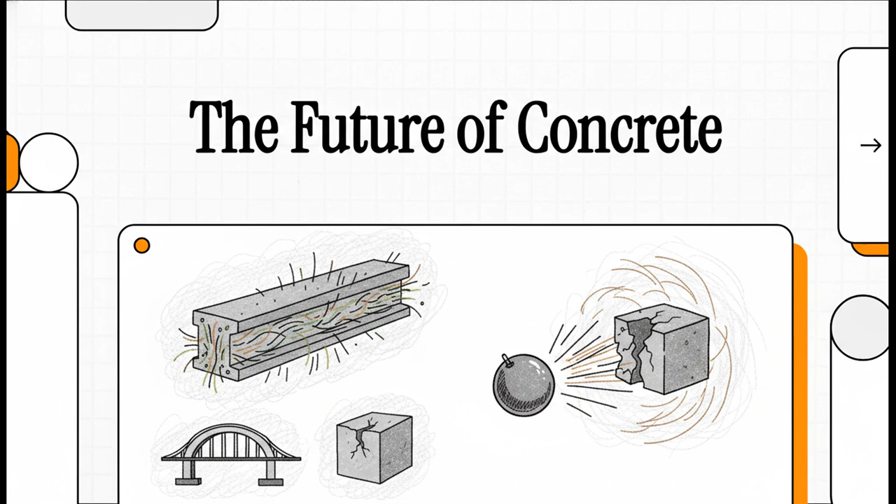All right, let's talk about the future of something we see every single day, but probably don't think about much. Concrete. I mean, it's literally the foundation of our world, but it has a breaking point. So what are we going to do to fix it? Let's dive in. Think about it. The structures we depend on, our homes, our bridges, our highways, they all face some really serious challenges. The very material that's supposed to give us strength and shelter, well, it has a fundamental weakness.

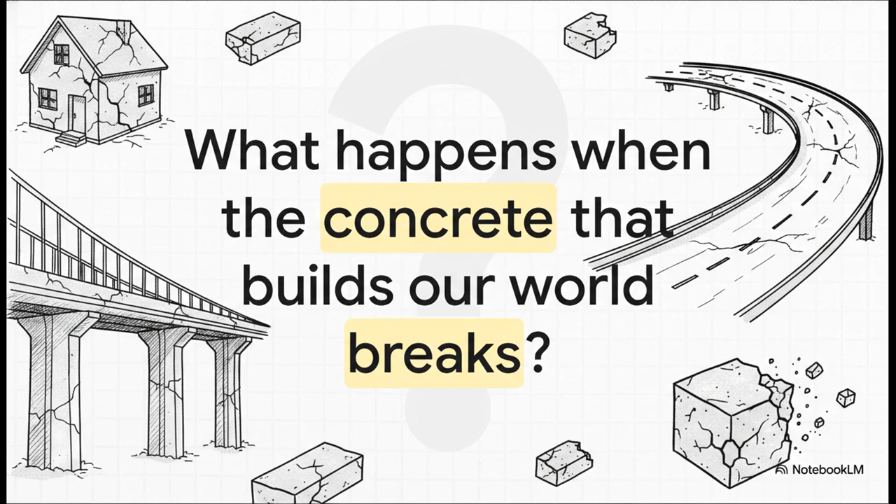Okay, so let's get right to the core of the issue. You see, normal concrete is amazing when you push down on it. That's called compression. But the moment you try to pull it or bend it, it cracks. And that's where all the trouble starts.

I mean, our infrastructure is getting old. Our bridges and roads are under constant stress, day in and day out. This makes them super vulnerable, especially to things like earthquakes, which can be just catastrophic. And that endless cycle of patching things up and replacing them, it doesn't just cost a fortune, it's also got a pretty heavy environmental footprint.

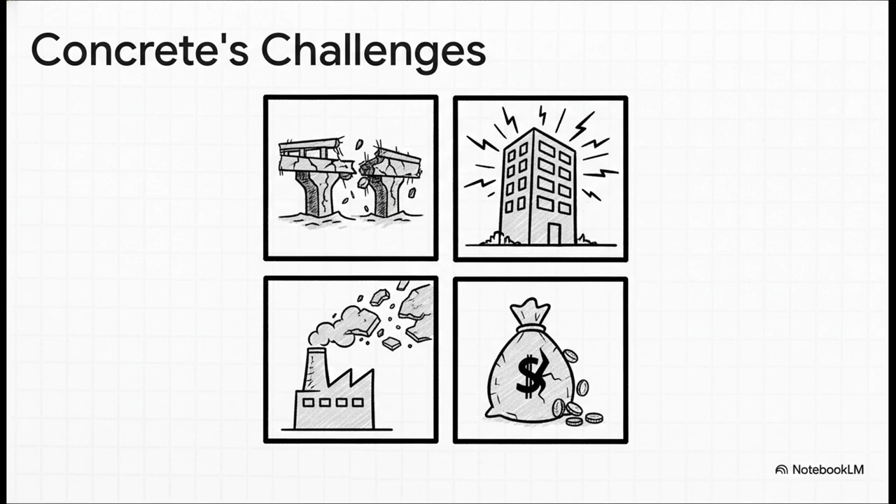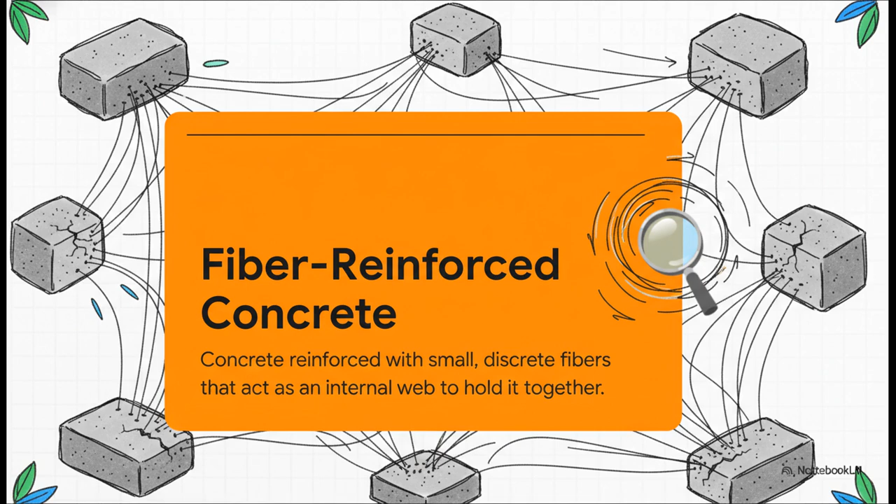But what if we could give concrete a superpower? This is where things get really interesting, because an incredible innovation is changing the material from the inside out. It's called fiber reinforced concrete, or FRC for short. And the concept, it's actually super simple, but totally revolutionary. You just mix these tiny, high-strength fibers right into the concrete. What you get is this internal microscopic web that holds everything together, stopping tiny little cracks from ever becoming big, dangerous problems.

And the difference is just stark. We are not talking about some small, tiny improvement here. Regular concrete is brittle, it snaps, but FRC is ductile, it actually bends. So you go from something that's prone to cracking to something that's crack-resistant. That means way better durability and a much, much longer life. It's a complete fundamental upgrade.

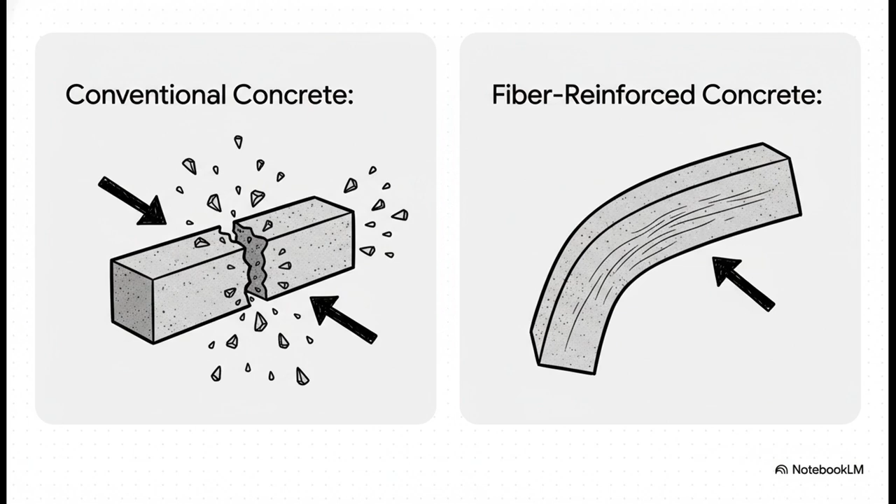So how does this actually work in the real world? Well, this innovation is helping build a safer environment for all of us, especially in the places where it really truly matters the most. So get this, the research points to some seriously powerful ways to strengthen buildings that are already standing. You can wrap critical columns in these jackets of ultra-high-performance FRC. That's like the super soldier version of this stuff to help them carry more weight.

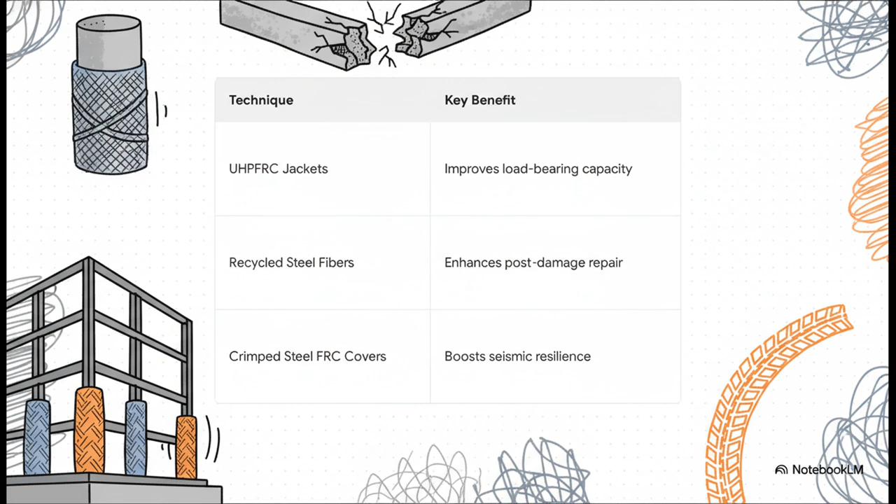You can even repair damaged beams using concrete that's filled with fibers made from old, recycled tires. How cool is that? Or you can add FRC covers to help a building ride out the shaking from an earthquake. And when an earthquake hits, the impact is just huge. A normal structure, well, it might just fail completely. But an FRC retrofitted structure can absorb so much more of that energy. It can actually bend and flex without breaking, and that can be the difference between a building that's still standing and one that's a pile of rubble.

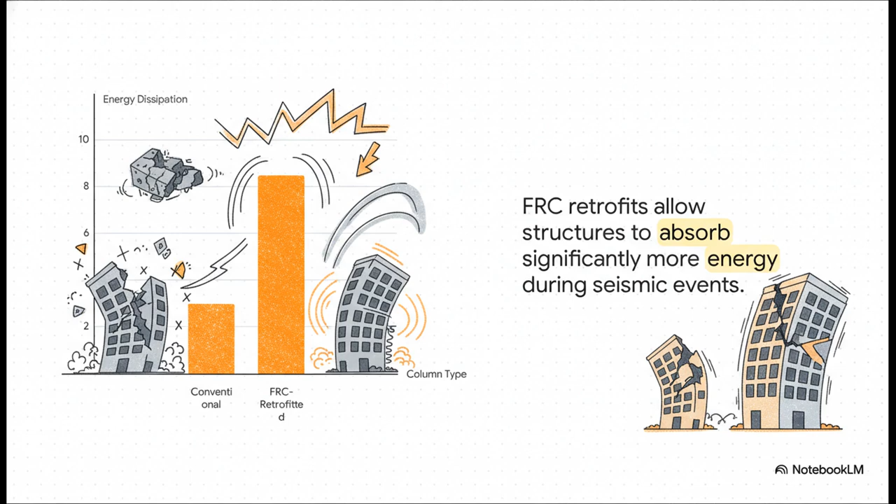And hey, don't just take my word for it. The research totally confirms this. Study after study shows that these FRC retrofits dramatically improve a building's ability to handle an earthquake. And that means safer buildings, and of course, safer communities for all of us.

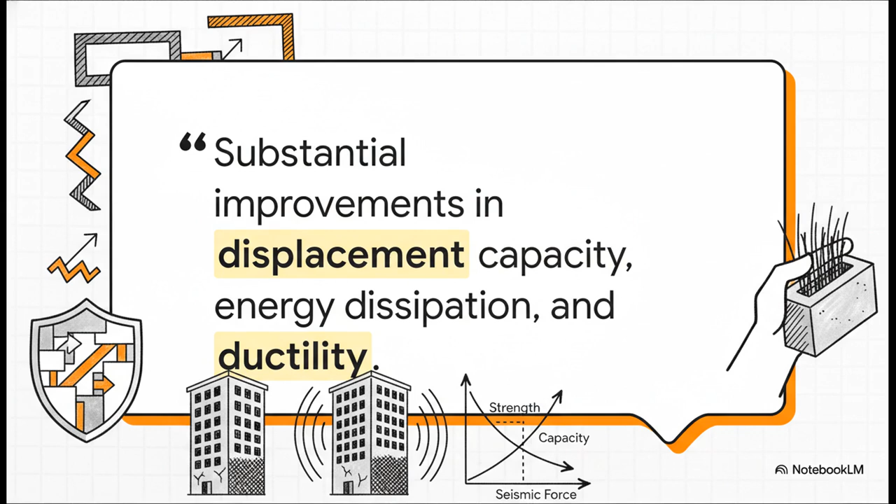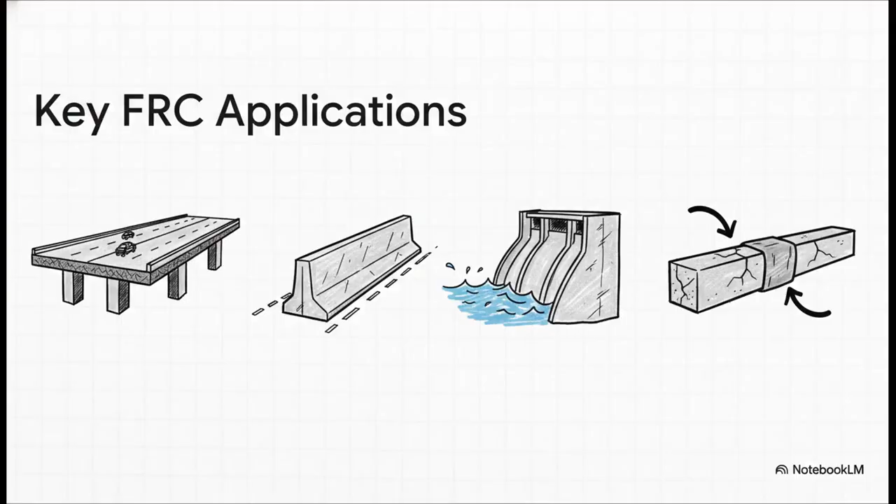But this incredible tech isn't just for buildings. Nope, it's also completely revolutionizing the roads and bridges we all travel on every single day. By putting FRC into our infrastructure, we can build stuff that can handle the constant stress from traffic, weather, and just time itself. We're talking about everything, from the surface of a bridge to the barriers on the highway, all of it made tougher and way more durable.

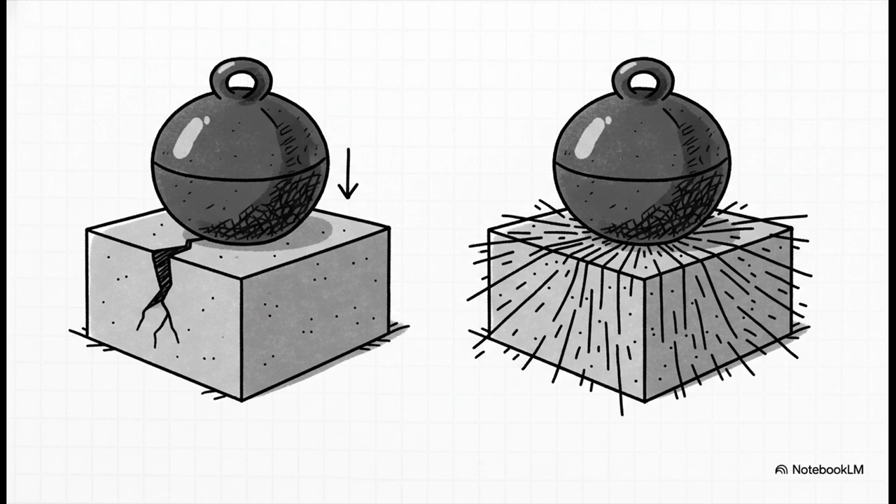So the bottom line is this. Because FRC is so good at controlling cracks and spreading out weight, it leads to infrastructure that lasts so much longer. And what does that mean for you and me? Fewer potholes, fewer road closures, and a huge reduction in that constant expensive cycle of repairs.

Okay, but here's what might be the most exciting part of this whole story. It's how all this strength is connected to sustainability. This isn't just about building better, it's about building smarter. You see, this is all about intelligently reusing what we already have. Those fibers that give the concrete its superpower, they can come from old discarded tires. We can use waste sand and recycled chunks of old concrete right in the mix. We're literally turning trash into a high-performance building material.

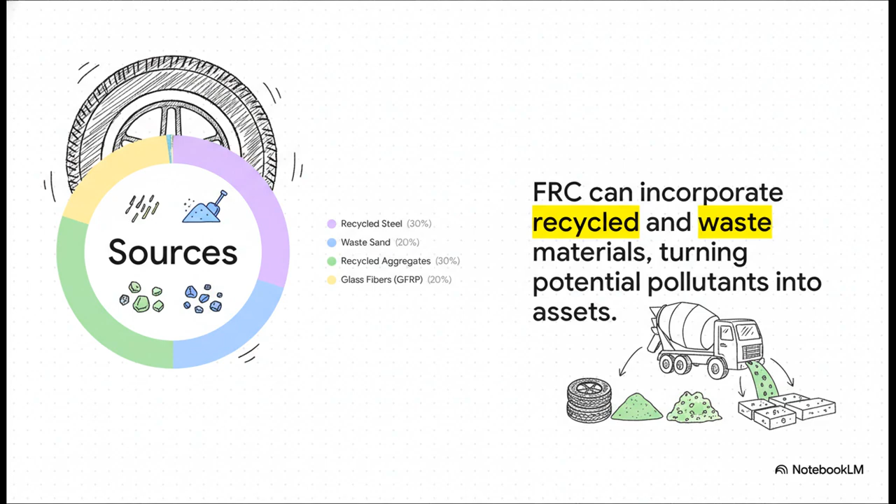And this creates this amazing, virtuous cycle. It's a positive feedback loop, right? First, you use waste to make stronger concrete. Then, that stronger concrete lasts way longer, which means you're doing fewer repairs and replacements. And that, in turn, creates less waste in the future and uses up fewer new resources. It just keeps getting better.

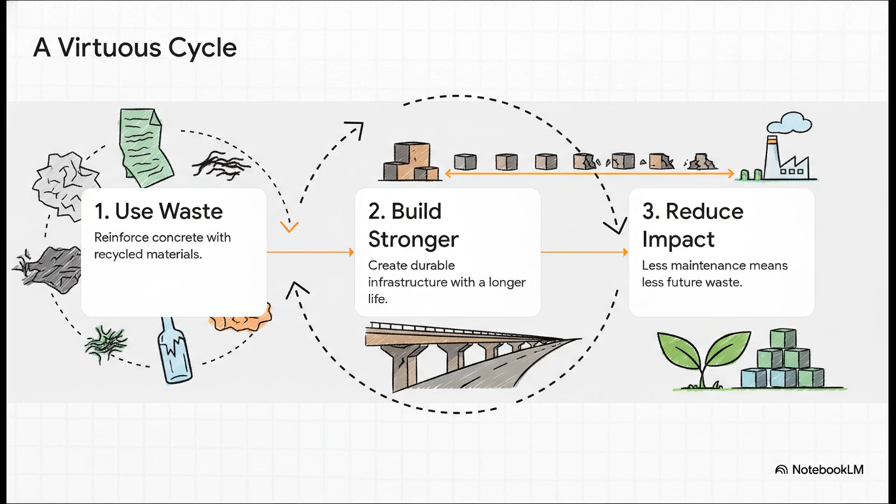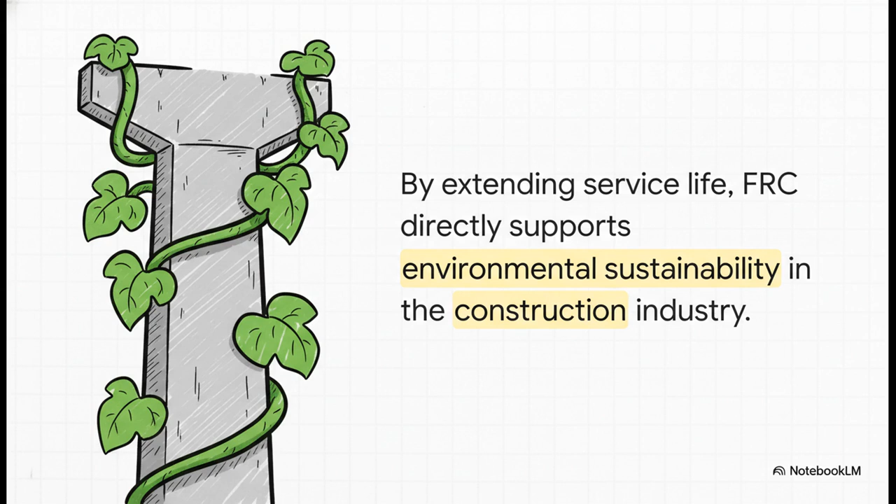And that's the big takeaway. That's why this matters so much. Stronger concrete is greener concrete. By making our cities and roads more resilient, we're also making them more sustainable. It's a total win-win for our communities and for the planet.

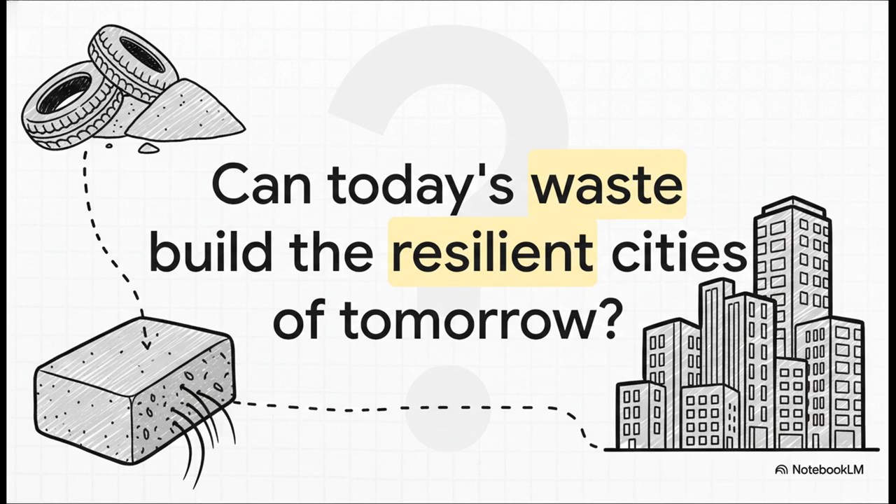It's a pretty powerful question to end on, isn't it? And from everything we're seeing, the answer seems to be a resounding yes. This really points to a future where our waste, our old tires, our leftover sand, doesn't just end up in a landfill. Instead, it becomes the very foundation of our strength.